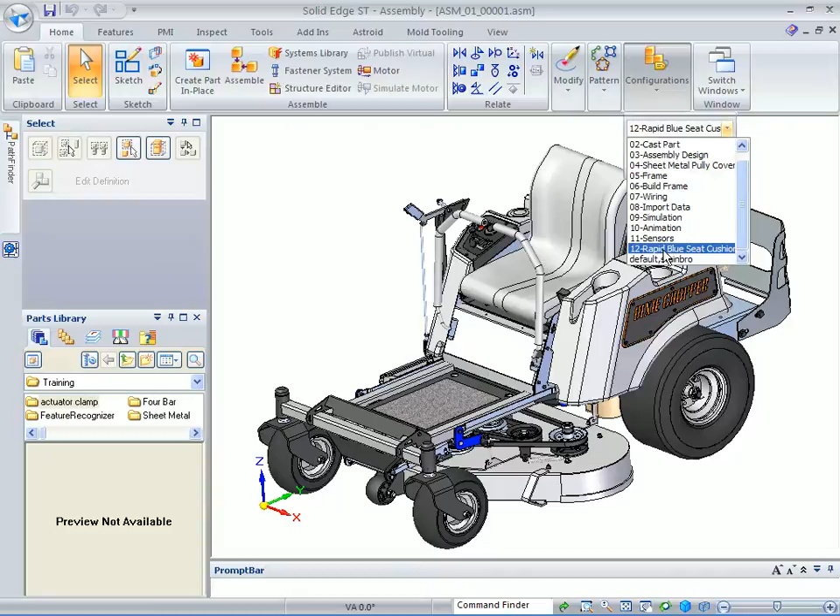If we go over to our Pathfinder, you can see that if we expand this active subassembly, at the very bottom is another extra subassembly called underbar B, which allows us to go in and show modeling this underbar B part, which is the cushion. So you can just double click that to in place activate.

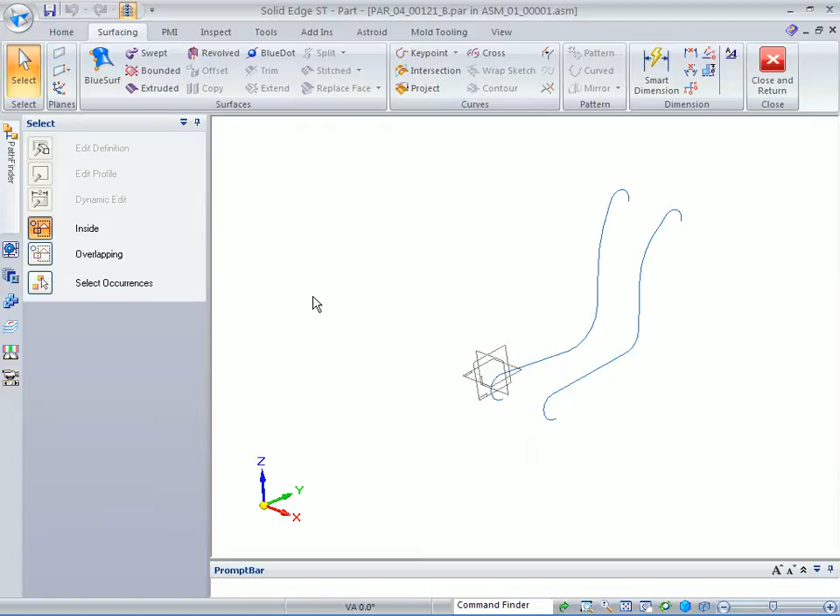You can see I have two curves already existing in the model. If I turn on the background, you can see it in the context of the part that we have this black seat frame, and we're just going to build this contoured cushion using surfacing.

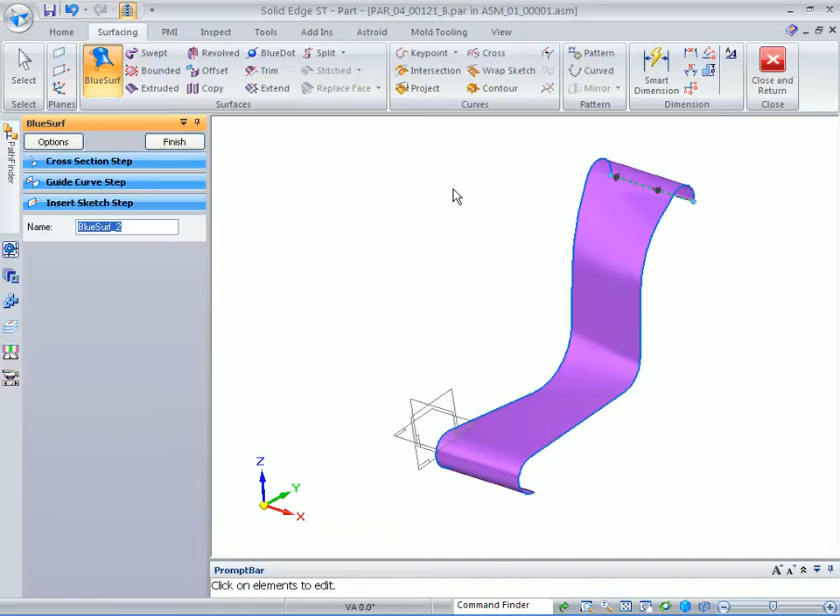So at this point, you can go ahead and use the Bluesurf command, and you want to just select those two curves and create a Bluesurf between them. Now this is going to be a symmetric part, so we want to actually copy that or mirror that to the other side. So we're going to use the mirror copy and just get that to the other side.

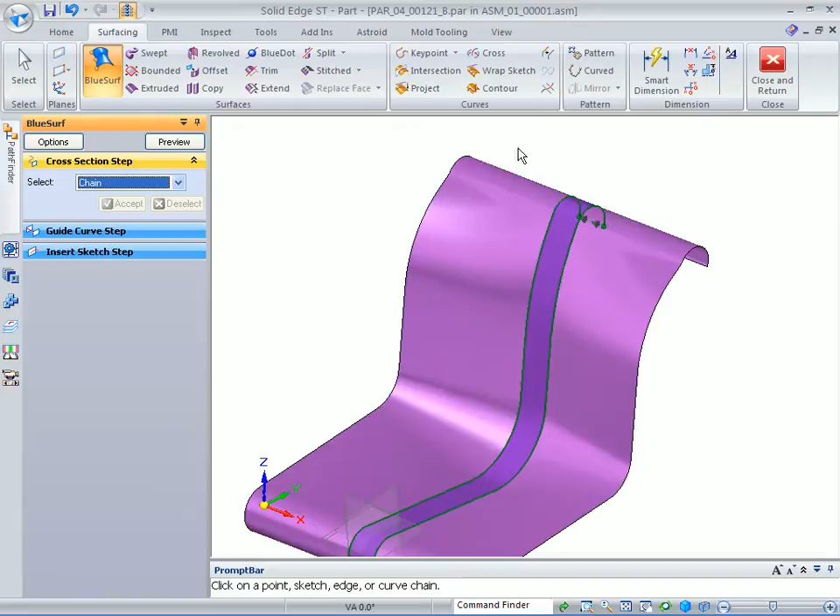Now what I want to do is build a Bluesurf between the two surfaces to connect them. The option I want to use is curvature continuous on each side, which is going to make a nice smooth transition between the surfaces. If I rotate this model around, you can see that I got a nice smooth transition.

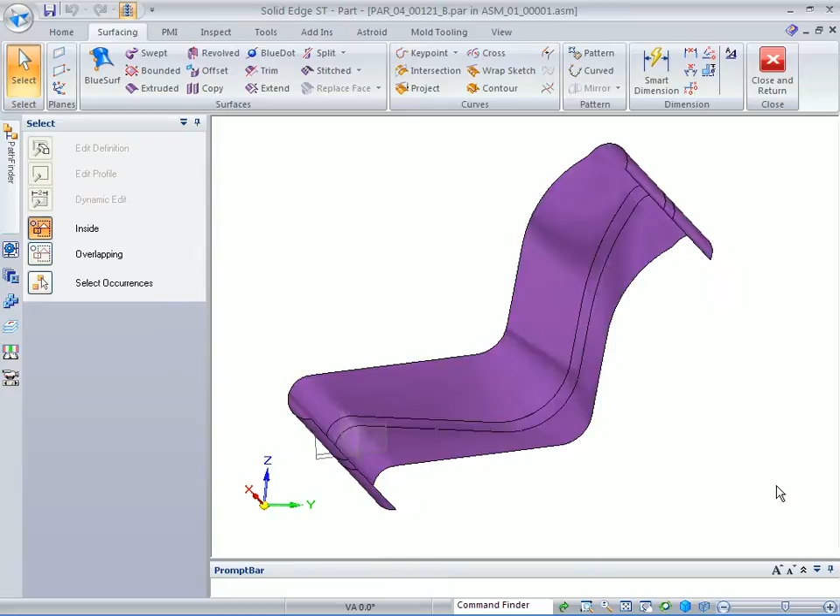Now we need to finish the back side of the seat, which is going to match up with that black seat frame. So we'll turn that back on here so that we can create an inter-part copy of the face on the seat itself, on the seat frame.

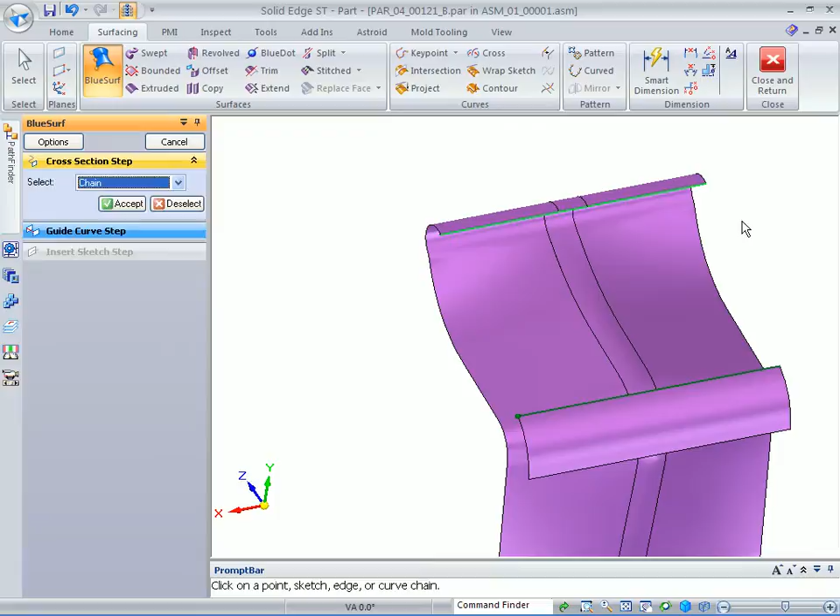And then we'll use Bluesurf to once again build a surface between that copied surface and the ones that we just created. You want to do that on both sides.

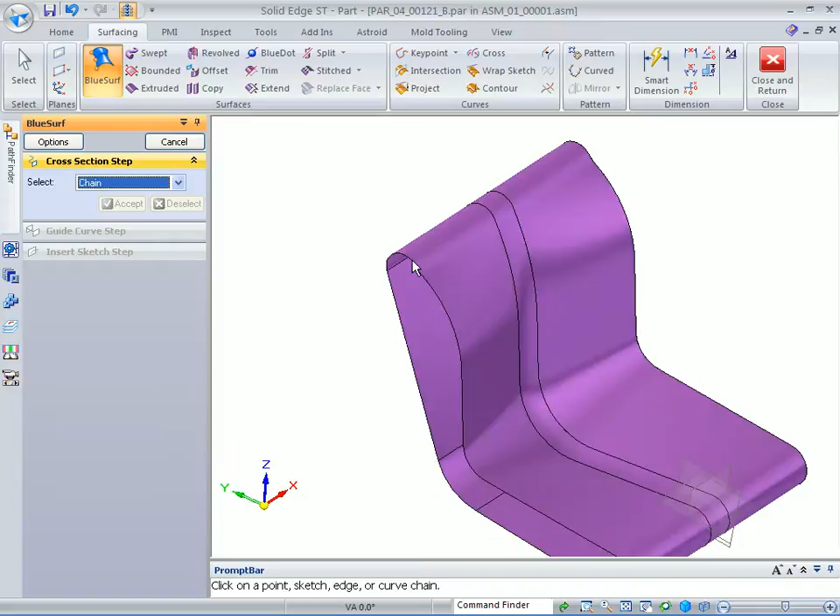Now we need to cap the end surfaces, so we'll do the same thing with the Bluesurf. Pick the first curve, right click, and make sure your cursor is close to the same end where that dot appeared. Just grab these three edges to cap that, and do the same thing on the opposite side. Select the first curve, right click, then select the next three.

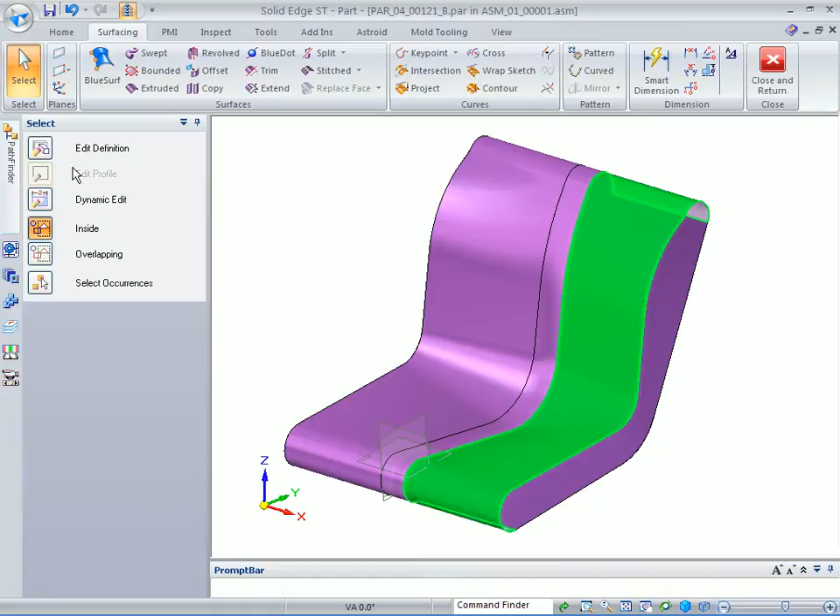So once you have that done, you're well on your way, and now we want to show adding some contour to the BlueSurf that we created. If we select that and go to Edit Definition, we can add some sketches to our curves.

I'm going to use the parallel plane option. First I'm going to pick this front plane, just come up to where it kind of bumps out there on the back of the seat. Do the same thing, parallel plane, pull that back about halfway, and then you can add one more in the other direction that runs the full length of the seat.

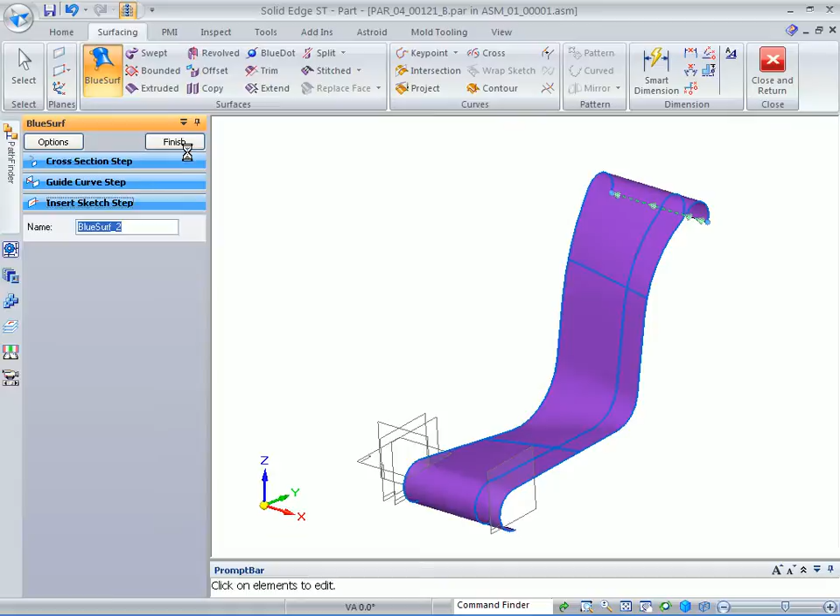And then when you're done with that, you can just click Finish to get out of that edit.

Now we want to show how we can use those curves to actually edit the surface. So if you pick that and go to Dynamic Edit, select it again, you see that you get the control vertices for the curve. At this point you can pick one of those control vertices, and you can pick whether you want to do a shape edit or a local edit.

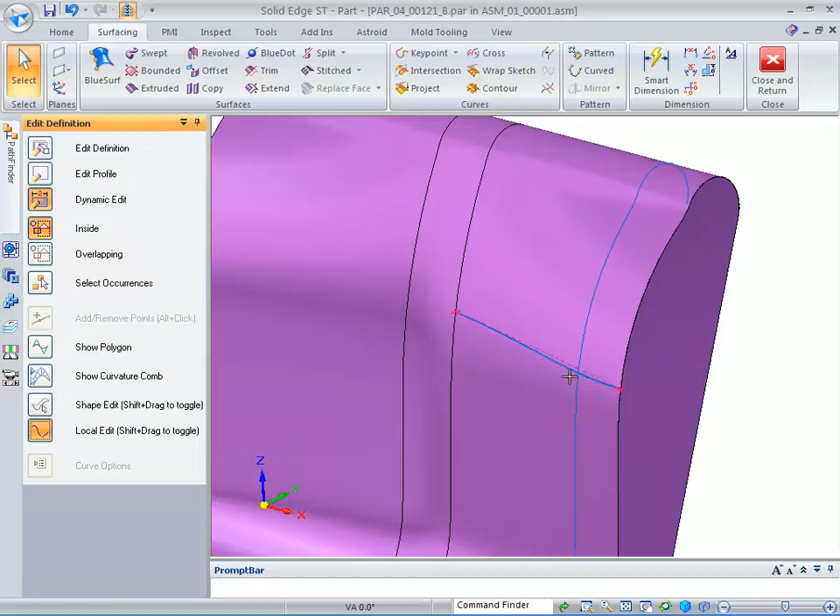In this case I want to do a local edit on this curve because I just want to bubble it out up in this area. So you see how I can add that contour in that area of the seat, and of course it's adding it to both sides because it is symmetric.

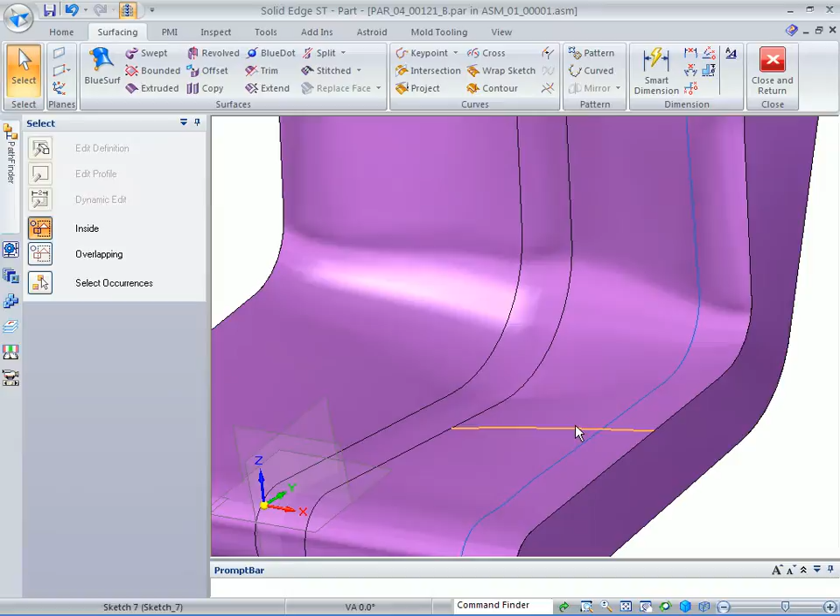Maybe I want to do the same thing to this curve. Again, I'm going to use local edit because I just want to push this up to create a nice contour.

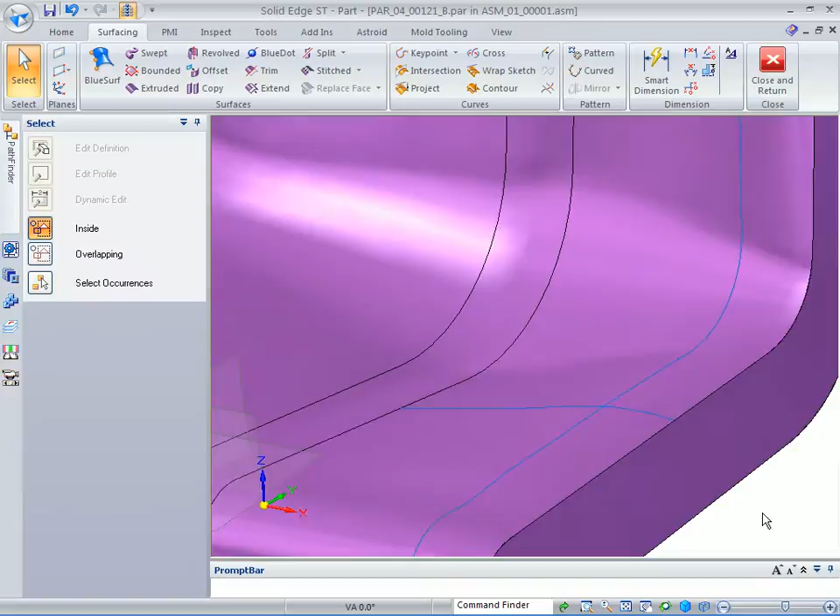You could also use blue dots to create a connection point between the two curves, which gives you another point to edit, so you can actually edit both curves at the same time. So if I put a blue dot between these curves.

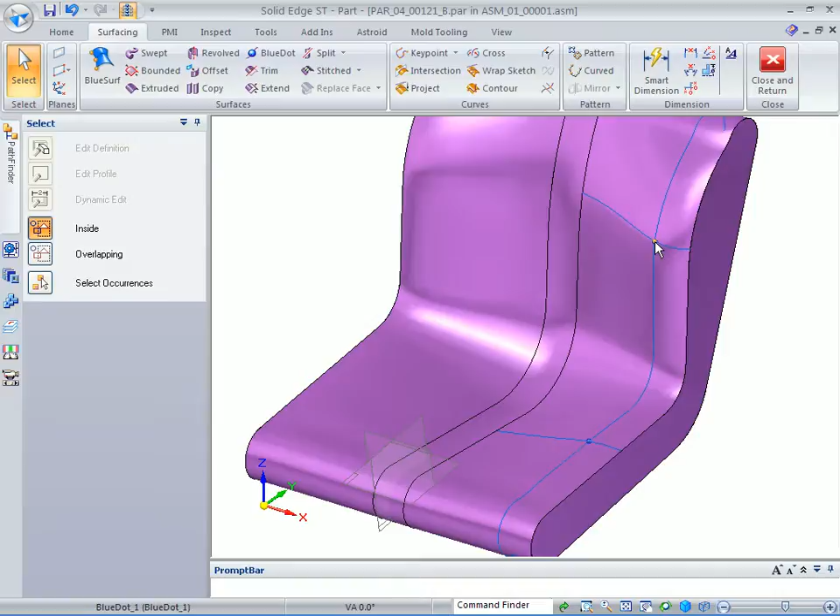Then I select that blue dot and go to Dynamic Edit. You can see that I get an option for creating local or shape edits. In this case, I want to change them both to shape edit. And if I pick that, let me zoom out here just a little bit. You can see I got this triad. I can use this triad to specify whether I want to move in plane or move in a particular vector. In this case, I'm going to move in plane.

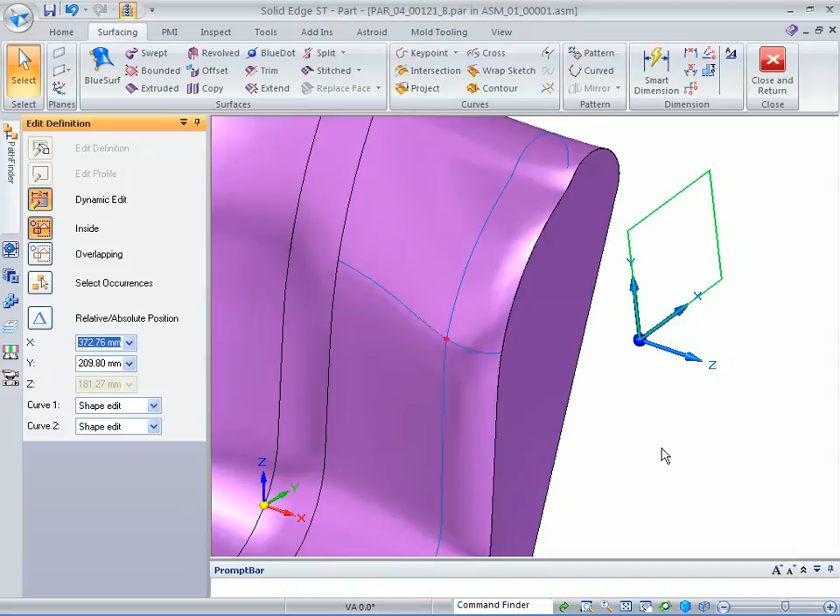I'm going to push that blue dot in just a little bit so it's not quite so aggressive on the curve. Let's see how I make that change.

On this blue dot, I'm going to escape here. I'm going to select that blue dot, dynamically edit it also in plane, and I'm actually going to pull it up slightly. Increase the curve.

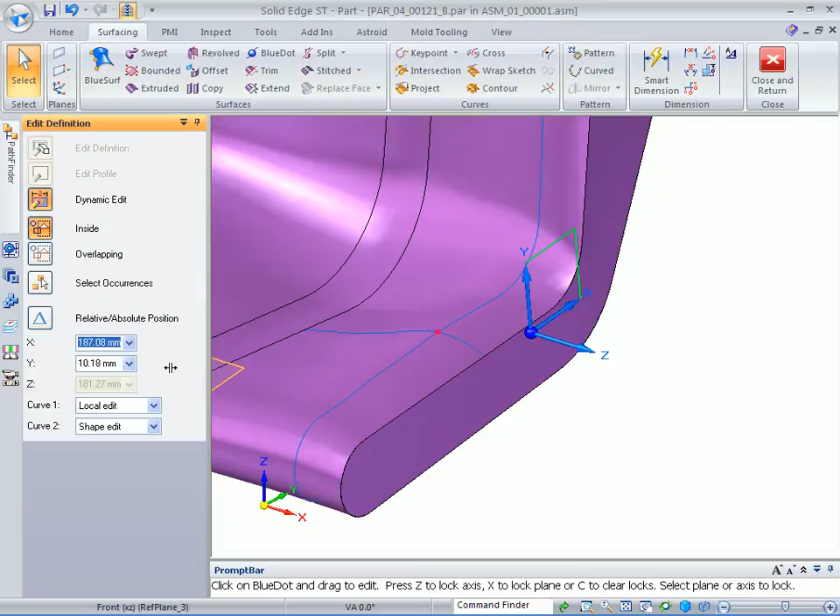So I was doing a local edit on this curve and a shape edit on this curve. You can play with that a little bit and modify those curves how you like.

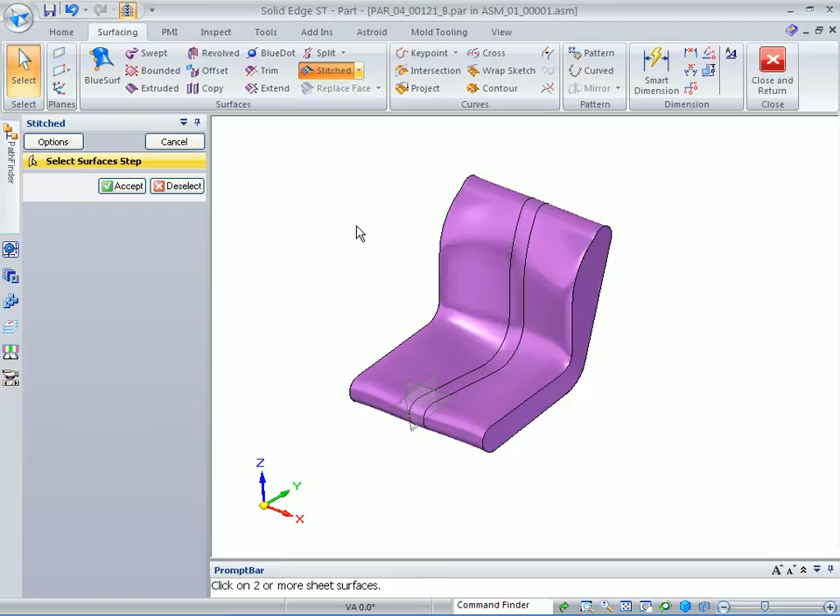Go ahead and hide all of the sketches, then hide the blue dots. Then the next step is to actually create this into a solid. It's surfaces right now, so we just stitch all of these surfaces together and create the solid.

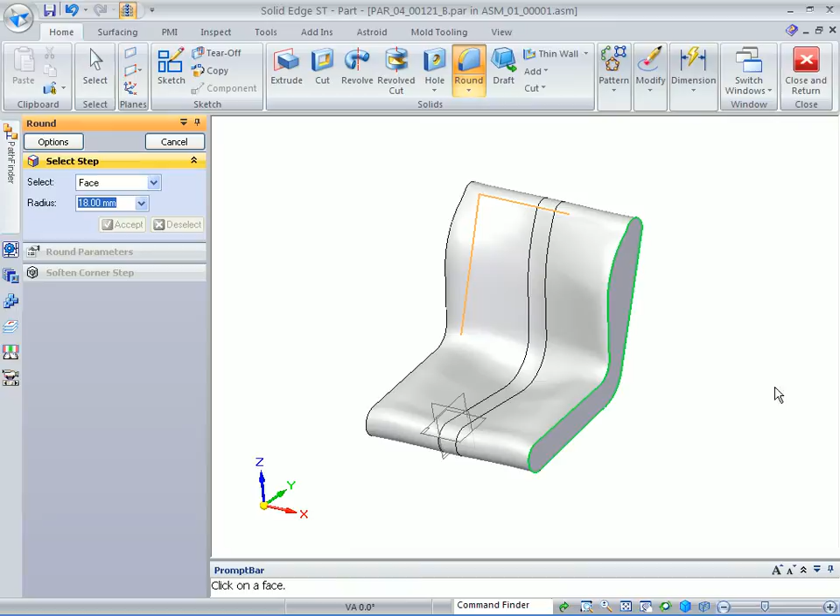Then of course you want to add some rounding to the edges. So I just use the round command, change this to about 18 millimeters, change this to face, and you can just pick up all the rounds that are associated to that face. It will round them at the same time on both sides of the part.

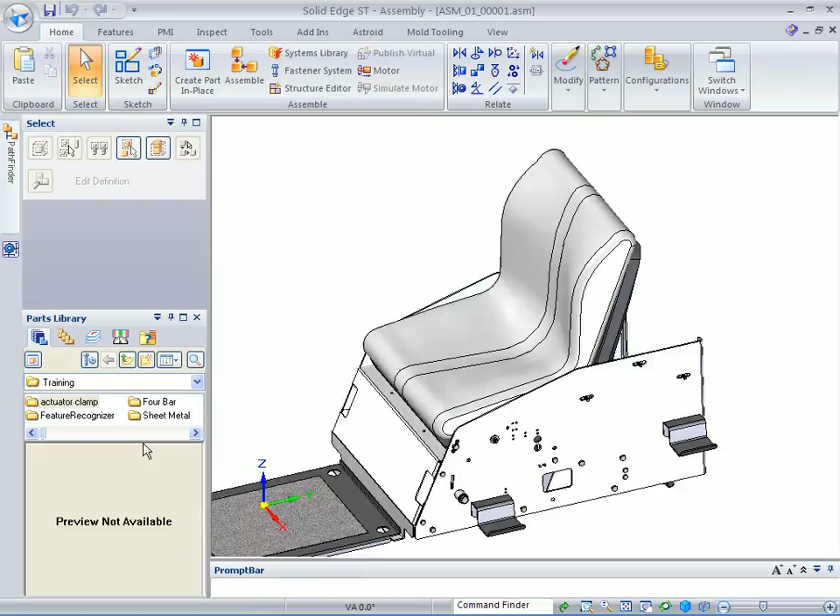And at that point, we're done with the cushion, so we can close and return and see what that looks like in the context of the assembly as it sits on that seat frame. At this point, you could change your configuration back to all parts if you like, to show all the changes that we've made throughout the demonstration.